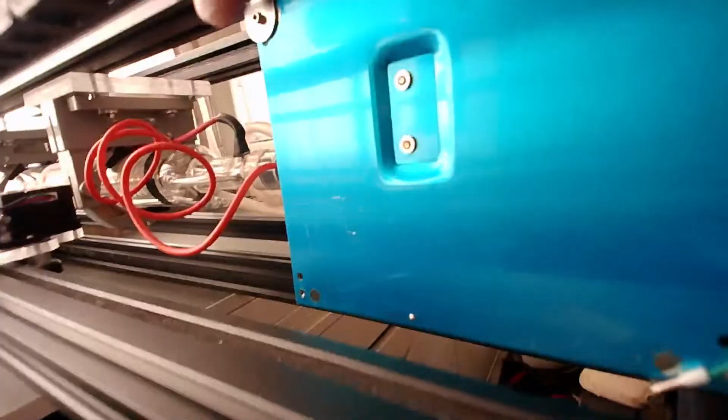It's just pushed inside, and I've moved this runner over so I can see all the LEDs and stuff shining on the panel. And the gantry - I can't see it very good, but in here I've put some foam, cut some strips of it, and used it to slot in the V like that. You put your cable in, push that in, and it sits in the V and holds your cable down. That was a good idea.

I found a few switches and things - about 4 of these illuminated switches. You can't see them. They're not really any good for high power though, it's low voltage stuff really. So I've got a load of these switches, but they're no good, all low voltage, no good for high power.

I found a pot, 23K. I don't know if it's any good for what we want, I'm going to have to find that out. But anyway, I found a knob to go on that pot. And various other switches, but I don't think I'll use some of these. I also found a water temperature gauge, and I've got voltmeters and stuff.

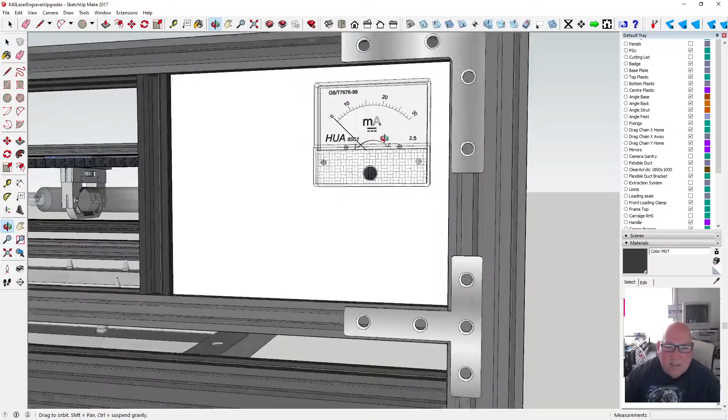Right, so last time we did a meter. Yeah, I did a bit of a meter last time.

So we need to put a rotary control in, some on-off switches, panel meters and stuff. So I think first we'll model the panel meter. A good friend who I bought a laser off for spares - there's a bag of bits with it, and I just noticed yesterday there was a little meter in there. Looks like a temperature gauge.

What's happened to the radio? Is there nothing happened?

Right, so we've got this little panel meter. Oh, it comes with its own little battery by the looks of it. Yeah, battery powered, so that's probably gone flat. Yeah, that's flat. I suppose we ought to light it up really.

I've got some voltage meters, a few which I've not used, picked up a while ago. Now the only trouble with this little meter is the lead is only so big, and it's a temperature thing I think. I ought to put some things in and see what it is.

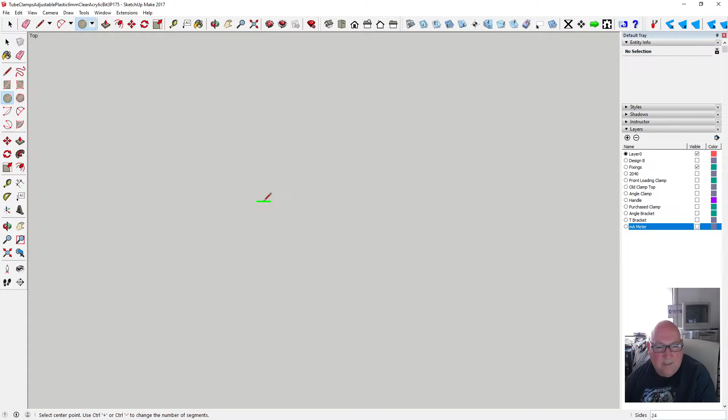Okay, so we'll go the right way up. Is it that way? Don't know, let's just do it that way. Right, 32 mil, so 16 mil, and it's 10 mil thick.

Right, that's the bottom steel bit, so we can colour that steel if you want. Let's colour that steel. Metal.

Okay, that's coloured. Right, the next bit is a bit of plastic, well, black - that's what we're modelling, that thing there. So it's another 32 mil diameter, but it's not so thick.

6.5 mil, so I'll go again. I'll just group that one - group it, group it. We'll do this one - 6.5 mil, and that's going to be a group as well.

And that's going to be painted black plastic, so we'll do synthetic. Okay, that's that synthetic bit.

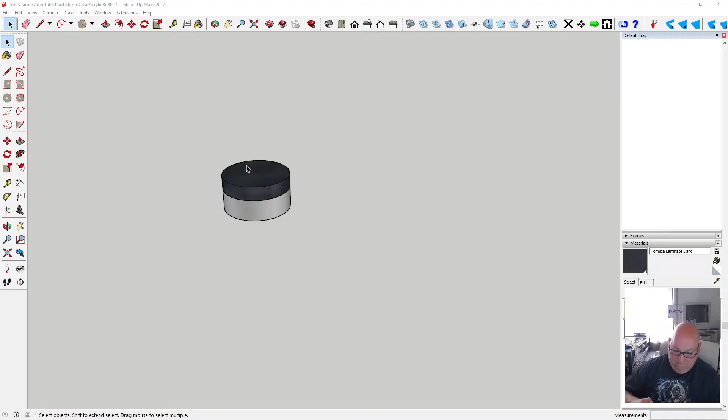So I still haven't fired this laser up yet. So that's a 9mm diameter, 9mm by 11mm.

So we'll go in here, so we do 4.5 by 11mm. That's the threaded shaft, and it's got a bit of a step on it, so we'll do 0.5 and then we'll drop that down. 0.5, that's it.

Right, and then we've got the other shaft - let's make that a group. We'll do it in stages, a bit like the Apollo rocket.

Right, then we've got 6mm by... 10.5, so 6mm by 10.5. 3mm and 10.5. Okay, that's a smooth one.

There is a little bit of a slot in the top, so again we'll bevel it. Let's do it again - 0.5 and drop that down, 0.5, and don't forget the slot.

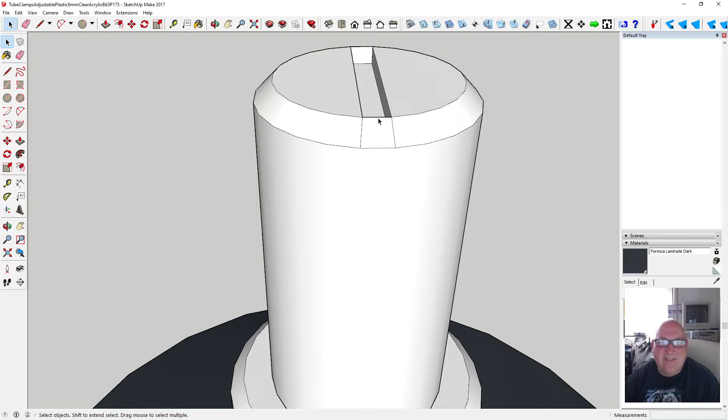Anyway, my gaffer laughed today. I said I've got to go on a live stream tonight and show this bulkhead. I said, how many people are watching? Not a lot. They laughed at me. Oh well.

They laughed at me. Can I get rid of that one? Yeah. Can't get rid of... no, can't get rid of that one.

Okay, it's a bit weird, I'll give you that. But anyway.

Oh, somebody's playing Silly Buggers on the radio.

Okay, so we've got a slot. It's a bit of a weird slot, I'll give you that, but anyway, it's a slot nonetheless.

Somebody's doing test signals.

Okay. Right. So let's make that a group.

Okay, so we've got something like a pot. We've got to put the... there's a bit more to it than meets the eye. No, actually there isn't at the minute, because I haven't put it on. If it was on, then it would meet the eye. There's more to go on it that doesn't meet the eye at the minute, but it will do once I've done it. Crazy.

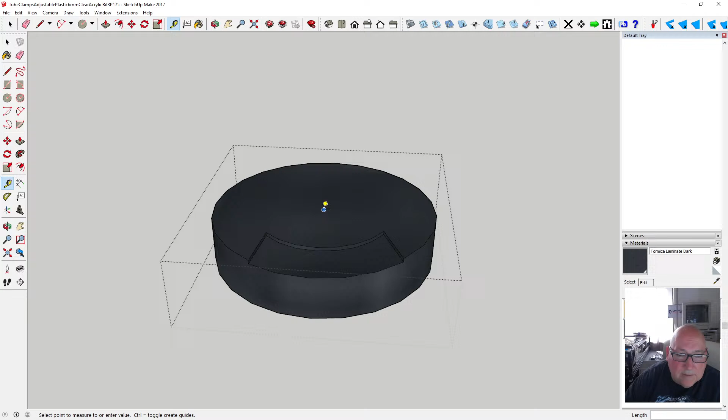And it's, where is it from the edge? Hang on, let's try and work out centre to centre. 13 mil. So if I go from the middle, it's going to go that way, I think. 13 mil. No, it's going the wrong way.

Right, 13 mil. Right, now the problem is it's not quite in the right place. So let's say it's 1.25. And it's... how high? How high can you climb? 2 mil.

It's 2 millimeters. How high can you climb? There's also a step on this somewhere. Yeah, metal step, so...

Alright, 10 mil. So we want a little bit of a plate here in the middle. 5 mil. Like that, and it's flush with it, but it needs to be coloured silver. Metal.

That's it. Okay, and then we've got the prongs that come off. Oh, there's some dinks, some little locator things. Right, we better put the locators in. There's some kind of locators in that sit down the side here.

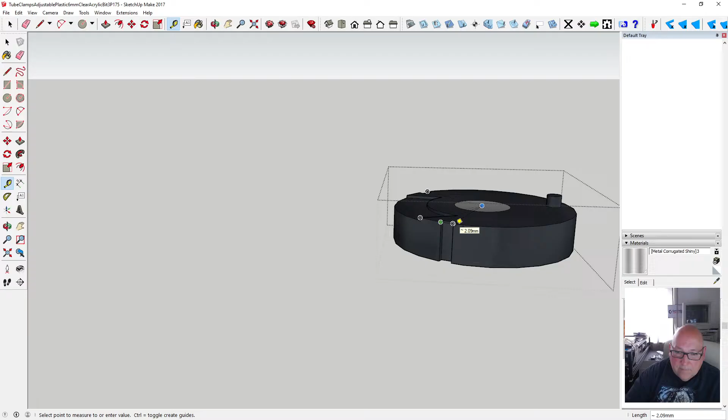Oh, we've got 2 mil. So we need the centre point. So I'll draw a line down. And I'll get a reading off it. 1 mil. And 1 mil. Draw 2 lines.

And get rid of that line. Get rid of these. And push it in by... need to push it in. Oh. My fault. Look what I did to that. Drew it nowhere. I drew it nowhere. It's out in the middle of nowhere, that's why.

How am I going to do that? I have to get rid of it. Guess, I suppose.

1 mil. It's got some weird stuff going on here. Okay, so that's sort of what we've got. You won't see that bit.

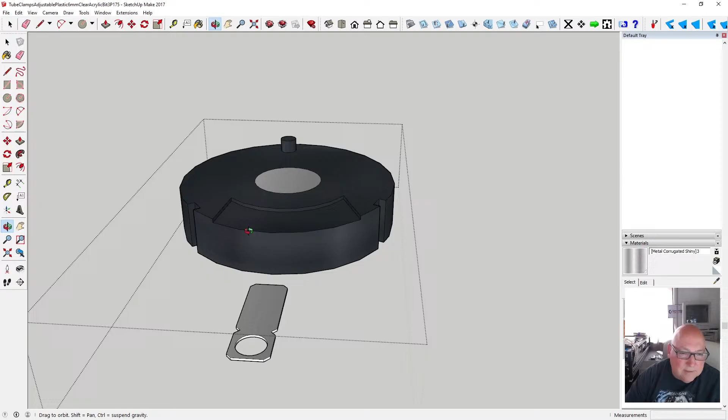Okay, right, so we need to get it now. Make it a component, or group it. Let's make it a component.

Right, so I need to move it to somewhere. Like that, and now it's the wrong angle, so we'll have to just move it. That looks about right, sticking out quite a bit, so it needs to go in.

It needs to go in a little bit towards, so 0.5 in. Okay, it needs to stick up a bit. Oh, it's actually set down if anything. Set down, so it needs to go down about 2mm. Okay, 2mm down, and there's a kind of gap, it looks like it's sealed in there.

So we want a bit of a, probably about 1 mil. Booming. So then we've got a bit of a gap here. It's not quite like that. And it goes down almost to the base. Let's say 1.75. Yeah, that's about it.

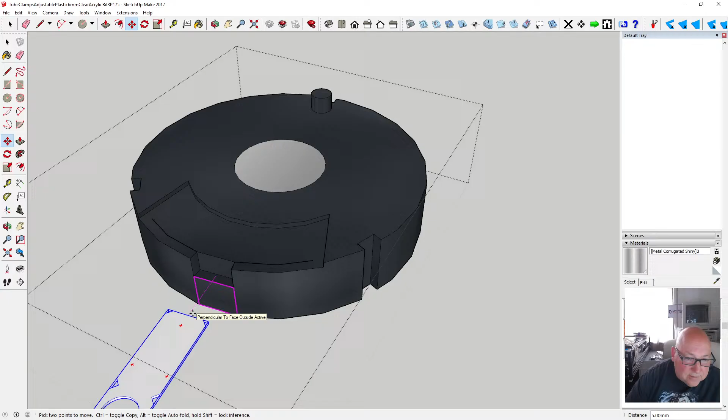I need to move it in, needs to go in towards the centre. How can I get it to? That's it, that's the one. Let's just save it.

Okay, we want another 2 of them, another 2 of them. So that needs to go all the way over. Okay, and this one needs to go all the way over to there.

Then we want a line like that, and a line like that, and we can get rid of this line and this line, and we want to go down 2.25 and 2.25. Can I get rid of that? Yeah, extra geometry I didn't want. Right, okay, so that's that, but we need another one of these.

Another 2 of these, so what I'll do, I need to rotate it, need to grab it from here, and copy it, and put it somewhere here. So look, that's not too bad.

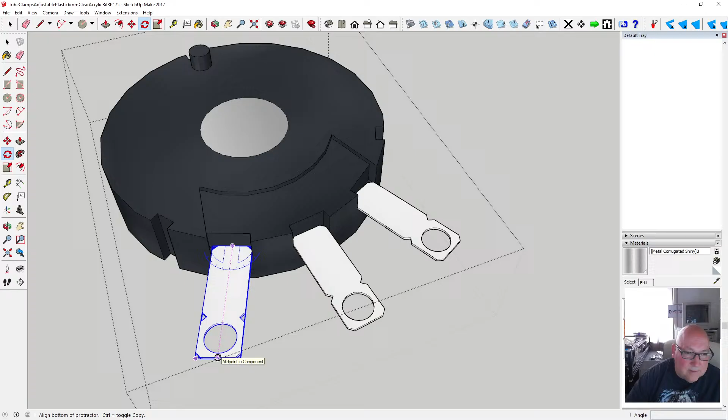I need to go in. Oh, it needs to go just in towards something. Right, don't know, what's that like? It's not that bad, is it? Right, okay, it's not that bad.

Okay, so we've got something like that. Right, so that'll do for that. Save. Nuts next, nuts and washers.

Right, so the washer is, diameter of the washer, 15 mil with a 9 mil ID. So 4.5, oh, that's the other bit, sorry, wrong. So 15 mil, so 7.5 with a 4.5 inner.

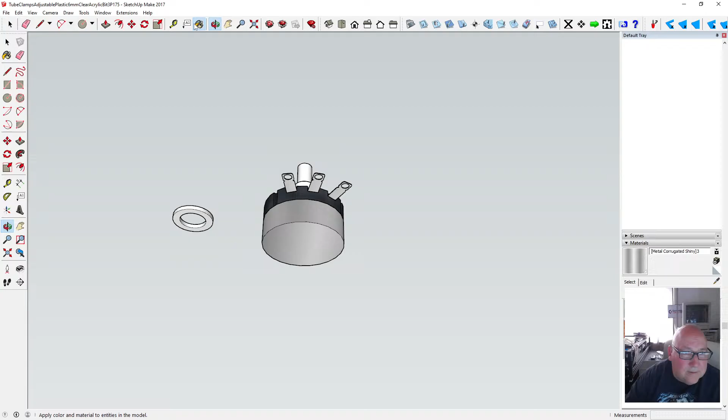Right, let's try and do the split. So this washer, it's slightly offset, isn't it? There's a cut in it. Right, that's interesting. It's slit on an angle. It's slit right on an angle.

You don't realise until you look closely at this stuff. Right, so let's get it slit on an angle, and it's coming from there to there, say.

Alrighty, hell. That's it. So we've got a bit of a slit going on. I've got to raise the one half up, the one half down.

So that's going to be interesting how I do that. So what I need to do is probably somehow, probably going to have to put a split somewhere over here, or a bend.

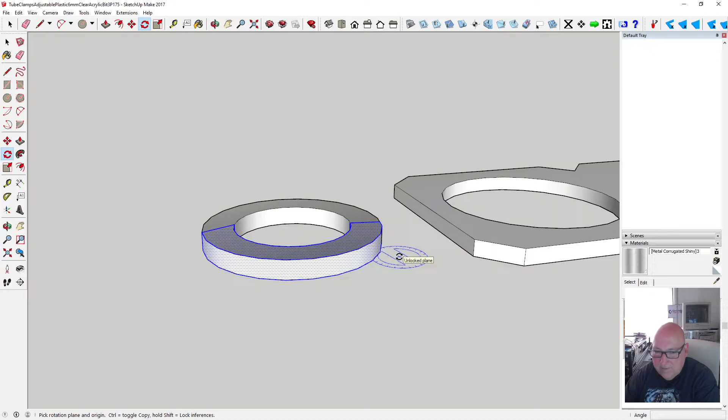I really ought to have this rotated on the axis. Let's try it. So if I go like that and like that, then lift. Oh, lifting the whole thing still. It's weird. Right, what about if I cut it?

And we need just to rotate this end. I'm in my own way now. Dear me. Oh, I can't see. Right. Oh, no, that's not good.

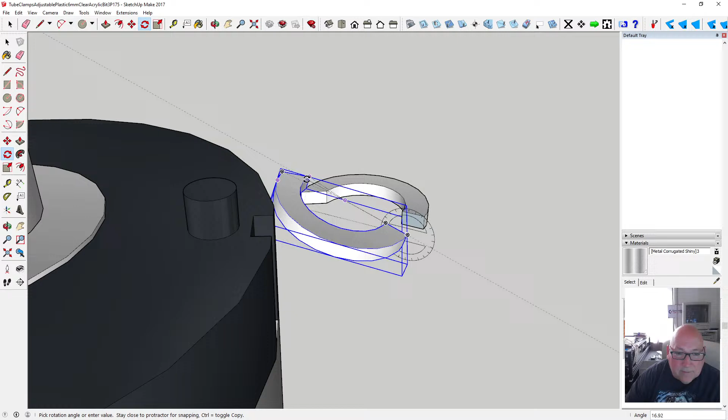And let's go this one up by 5. Did I do 0.5? Hang on, did I do something silly then? Right, undo, rotate, ah. I did 0.5 instead of 5, oh silly. Silly me.

So we're gonna go down by 5. And this one's gonna go up by 5. If it'll let me.

Come on, you can do it. I've got to go back. I'm too close to the thing. Ah, that's better.

And it's going to go up by 5. Okay. And then I've got to put the two together. Like that.

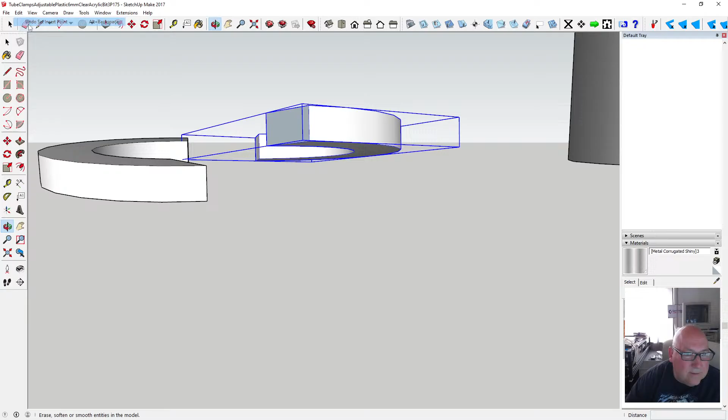So undo, setting for undo, move, undo, rotate, rotate. Let's try again.

Right, so we're going to rotate this by only 0.25. And this one we're going to rotate down by 0.25. And then we're going to join the two together roughly.

Okay, what have we got? Oh, I've done it silly, haven't I? Shit, I've done it by 0.25. It should have been 2.5. Oh well, right, we'll try again.

So rotate that up by 2.5. No, what the hell? Rotate that up by 2.5. Maybe it was right. Oh, I put 0.25 in it. Yeah.

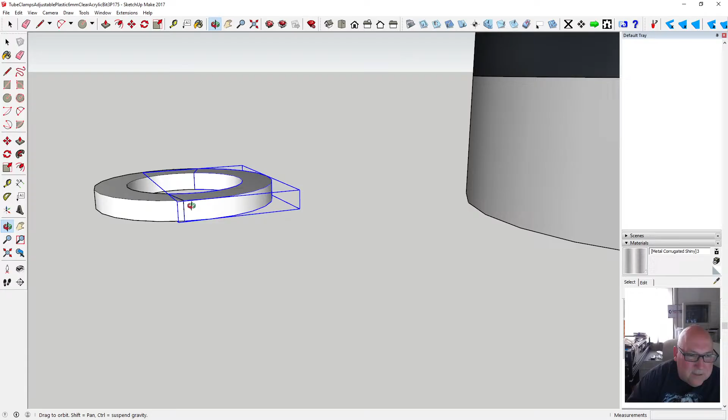So I've got no clue how to do this. Tell you what, it's not worth the effort. Tell you what, I'll cheat. Shall I cheat? Nah, let's leave it like that.

Oh shit, how can I do this now? Explode, explode. Turn that off. I'm in my way now. I'm in my own way. Right, so one piece again.

Right, that's it, I don't care. I don't care. I really don't care.

Right, so that's sat. No, it's not sat on anything. Why is it not sat on anything? It's a different size. It's a looser fit, yeah. It's not good.

Okay, we'll do it a different way. Grab it from there, go from there. I can't get the centre. Don't have a centre with that thing in the way. There's a centre.

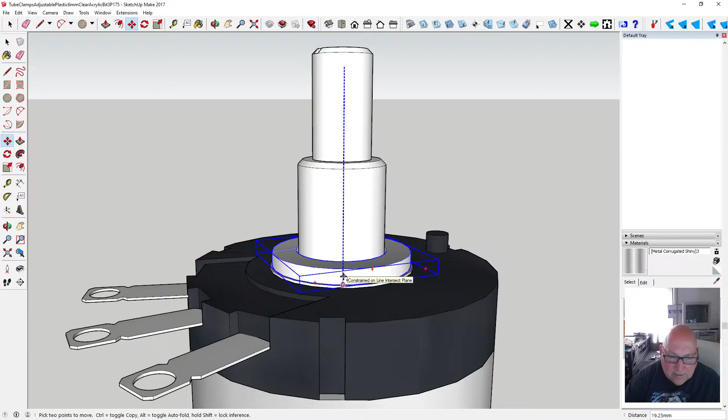Right, so we're going to come down on the blue all the way down to the surface. It's trying to tell me where it wants to put it, and I will go with that. That's fine. Right, so there's that.

Now we need the nut. The last thing to go on is the nut. The little nut. Let's do the nut. Do the nut before I do me nut.

I don't know how you do a nut, whether you do it from the flats or the sides, I've no clue. I think I tried the flats last time, it didn't work. So 13.5 with the inner ID of 8.

So grab one of these. 13.5. So it's 12.75. No. 6.75. 13.5. I forgot what the inner ID was now. 8. So 8.

Take that out. How thick is it? Thickness is 2 mil. 2.25 actually, but 2, okay, let's just do that.

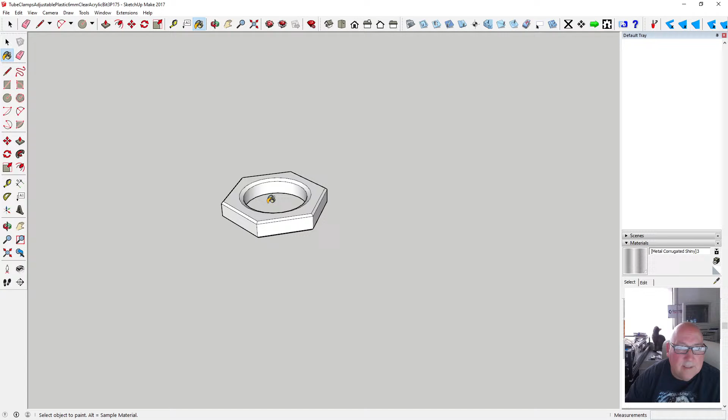without the thread. Let's paint it. I only paint the surface, I don't go painting everything, it's pointless really. I suppose I could paint this bit. Maybe the inside and that's it. Yeah. Maybe this bit. No. That'll do for the nut.

Right, let's make it a component. Let's put it on top. I'll do the same trick again, I think.

Okay, let's try that. Looks about right. All the way down, let it go itself. Is that right? It's not quite right. Ah, because I got it from the wrong side.

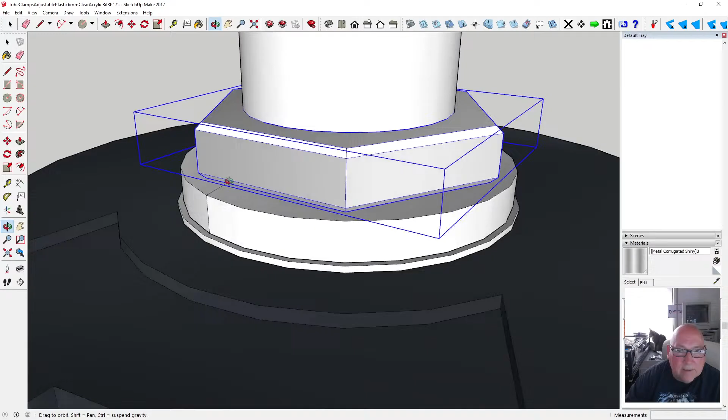Okay, oh, I suppose we better do a knob next. Gotta have the knob on it. I've run out of things to say earlier, so I just got more. I'm doing more.

Right, I can go back. Hello cat, what are you doing in here? How did that cat get in here? Let's get him on the camera. Hello cat, you alright? You got cat.

Cat. Right, I'll put that away.

Okay, the next thing is to model this little black knob with the red dot on it, the grub screw and the red dot. That should be easy, shouldn't it? Let's get on with it. Right, I need to make that into a component first though.

Make sure I've saved it. Always save it, you don't want to lose your work. Right, a knob, here we go. I'll start from upside down, seeing as that's got the infill.

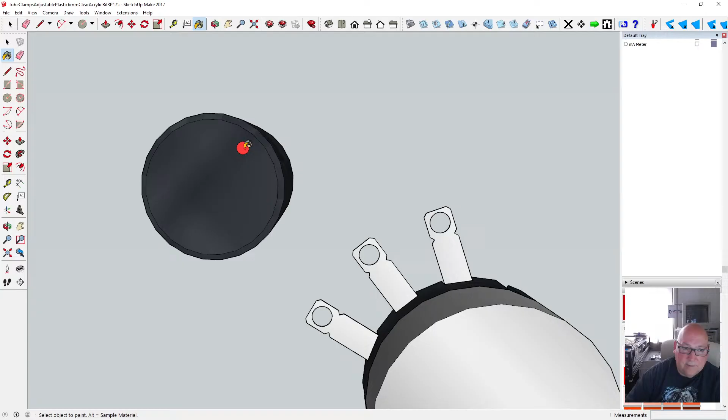Too dark? Too light? Not light enough? Too bright? That's it. Okay, so that's that done.

Right, just got to model this side of it now. Now there's a grub screw. How am I going to do a grub screw? Right opposite the hole. So that one there, there's a grub screw.

Let's see, keep it there. Let's say it's there. Ah, that's okay. So I'll put it there and we'll make it about that big. Yeah.

Okay, and it's got a rim on it. It's a little bit out, it's not sat nicely, so can I rotate it? No, I'll tell you what we'll do. Undo the circle. Let's put, alright, so let's put the circle. Oh, once you've clicked, it's too late. How do you get a circle? I'll tell you what, let's just compromise.

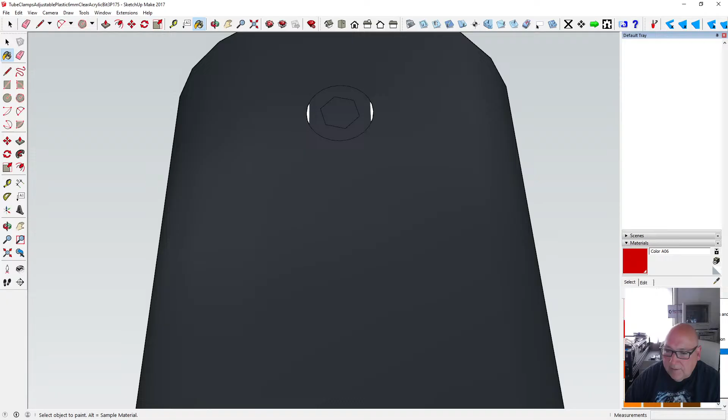Needs to be silver. That needs to be flush. Oh, that needs to be sunk a bit.

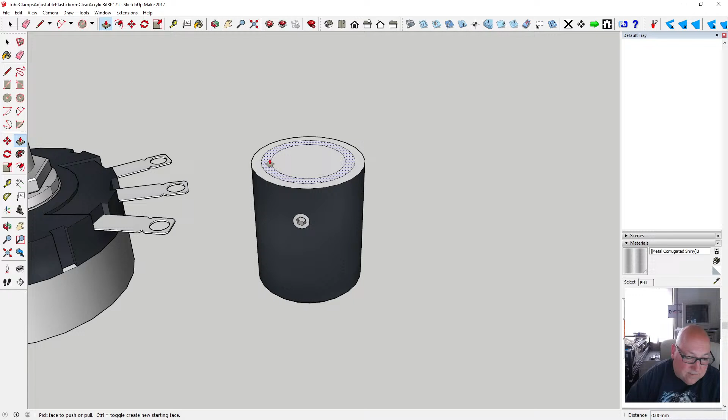Let's say the step is 1.5 mil, and we've got another step in of another 1.5 mil. Then we've got a drop down of... right, so it's a step, so that goes down a little bit, 0.5. This one goes down, looks like 2 mil. And then you've got the inner ID of 6 mil.

Three mil. So then that goes down all the way down, so about 6, say 7, 8 mil.

And then we've got to colour it, synthetic colour, and like that. Okay, and then this is brass. The rest is brass.

That'll be black down there, and this, got to find a brass colour. Metal, have we got brass? No, what's that? Rusted metal? No, okay. Brass colour. Let's try that colour. Bit too bright of brass. That's probably close.

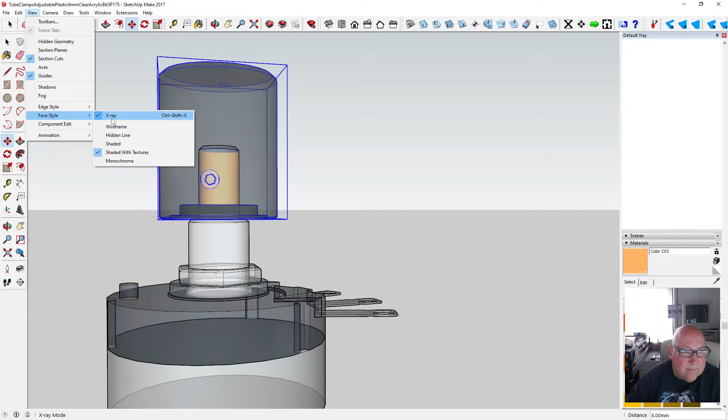Okay, we do it like that. Bring it down an arbitrary amount. That's as good as anywhere, I suppose. Alright.

Oh, we've got a lovely little pot. Actually, it doesn't look quite right, does it? I think it needs to come down more.

Let's just say it like that. Okay. Group.

Okay, so we've got pot, I'll just call it pot. Layer of pot. Pot layer, that's it. What else we got? Meter, T-brackets, clamps, handles, angles, old clamps, aluminium. Alright, so we need none of this.

Thanks for the call, sir. You're 5 and 8, 58, Roger.

Oh, bring back the pot. Okay, so we've got a pot. We've got a bit of a pot going on here, anatomically correct, somewhat. Obviously that'll be on a 1mm panel, so I need to bring the washers up. Need to bring that and that up by 1mm. That's it. So we've got a gap for the panel thickness.

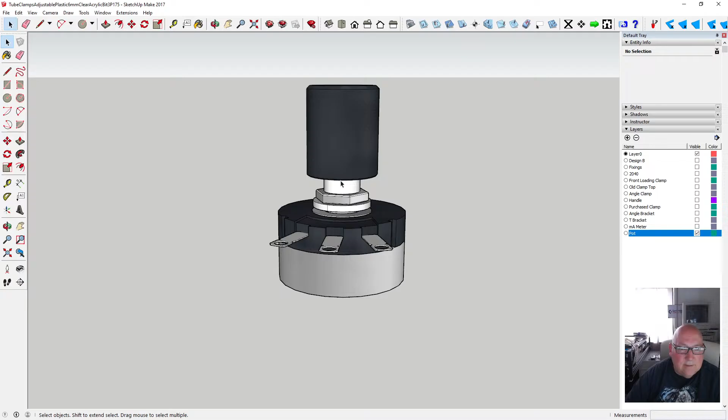Alright, copy. Over to the model. Paste.

Right, needs to be rotated. So we'll rotate it against that.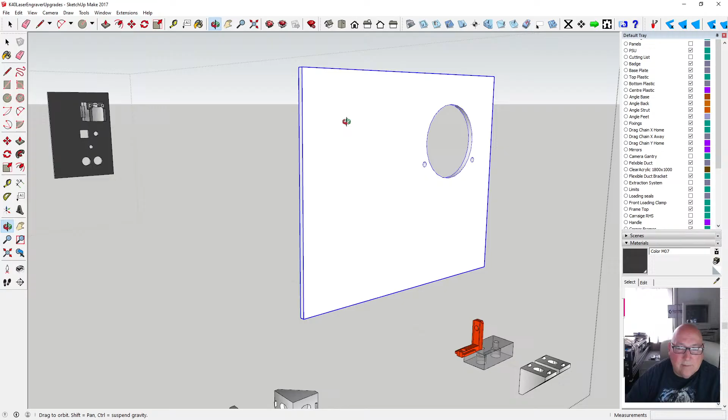Romeo 5, Romeo. 1mm, and it's anodized aluminium.

That'll do. Anodized aluminium. Oh, look at this, it's looking good. I haven't even got it in the right place yet. It looks good though.

Right, I need to go forward. Let's go this side and do it. So I need to get that flush. That needs to go flush along the green axis. No, it needs to go - it is the green, but let's keep going this way. Alright, let's have a look at that.

No, what's happened there? Oh, maybe right, yeah, I think it's right. It is right, but for some reason we're seeing all of this. We shouldn't be seeing all this. I know what it is, that needs to move up. Yeah, because we've got no... well, that locates in there, so yeah, maybe that is right.

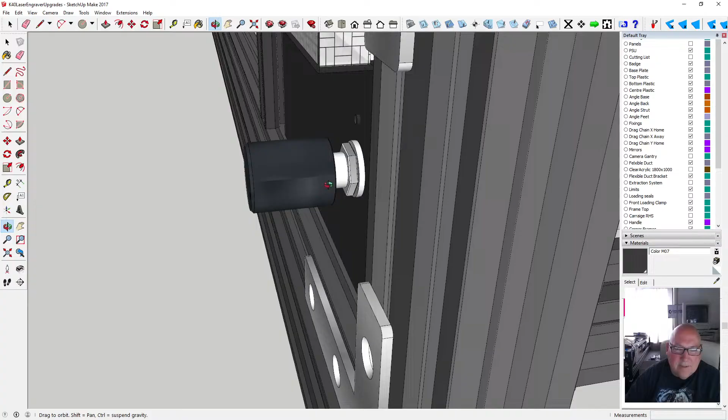Right, so what we'll do, we'll bring these washers forward to about there, then we'll move the whole thing back.

Still gotta go back more. Delta Lima 3 Charlie India, schönen guten Abend.

5-9, alright, and that's probably it. That's probably it.

Yeah, it's a bit better, so it'll need another nut on the back as a spacer, or a spacer, some kind of packer. Might have to mill a piece of plastic washer to go there, so this prong won't go anywhere. So it'll need another lock nut maybe. I don't know how they do it.

How do they do it normally? How do they do it normally? There's no writing on the back.

I suppose I ought to put some writing on the back to tell people what it is.

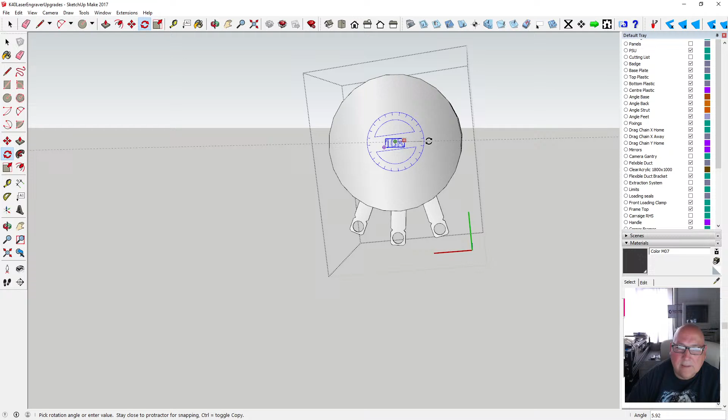Good evening, Golf number 4, November Uniform Oscar. My name is Val, you're 5 and 9 into Northeast England. Go ahead, thank you so much for the nice report, sir, and 5 9 for you. Let's make it black, shall we? 73, yeah, 73 is good luck. Thank you so much, Papa.

Papa. It's a 10K. Right, whatever, that's alright, yeah.

Okay, so we've got a pot, we've got our pot and power, tube power. Why is that like that, shimmering? Don't know, anyway, so that's that. Let's just save the whole thing. So, panel meter, now.

I was watching a video, some guy made it, got loads of buttons here, panel meters, all sorts of stuff, cooling, temperature. I suppose we better measure those. Let's measure those panels.

So we've got the one temperature gauge. I think it's a temperature, yeah, it's a temperature gauge. And we've got a plastic shroud for a voltmeter.

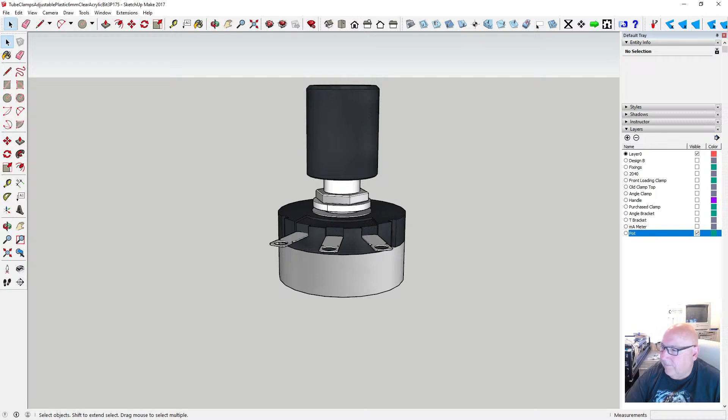Right, so let's model these panel meters then now. Right, so I'll go back over to the other thing. Right, okay, so here we go again, so we get rid of the pot. Right, let's model this out. I've even forgot, I forgot what I had on it now. Alright, let's have a look.

I'll tell you what, I'll just model the front first, the bezel, the outside. So that's 29 by 48. 29 by 48. So 29, so 48 by 29. Right, that's the front plate.

So then we've got a bezel, two mil bezel. And it's thicker the one way, so it's 3 mil the other way, 3 mil down. And then we've got an inner bezel that's 3 mil by, yeah, so we've got another 3 mil either side.

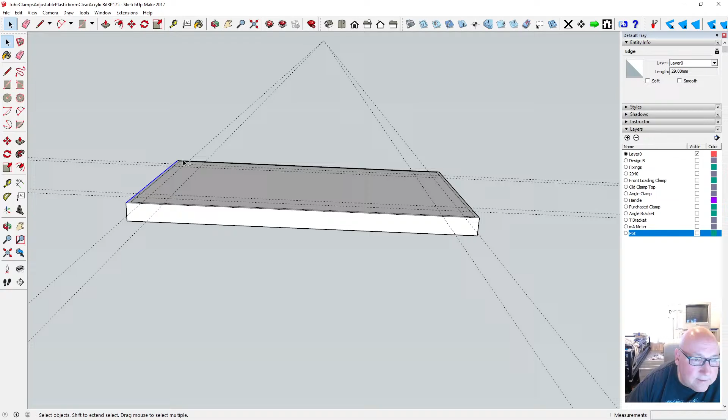So I've got to select that. Not that one. Not, yeah, that one, and that one, and that one. Just make sure I've got the right ones. I've got to pull that down.

No, I'm in the wrong axis. What is going on? By 0.5. Yeah, that's it. Then I've got a flat bezel.

So I'll draw, that's fine there. It goes... what's that? That's the wrong thing. So it goes like that, like that. Yeah, that's the flat area.

Then I've got an area here. Right, and I've got to push the whole thing down. And it goes off on an angle, so let's join that up with that. Right, and I've got to pull that down.

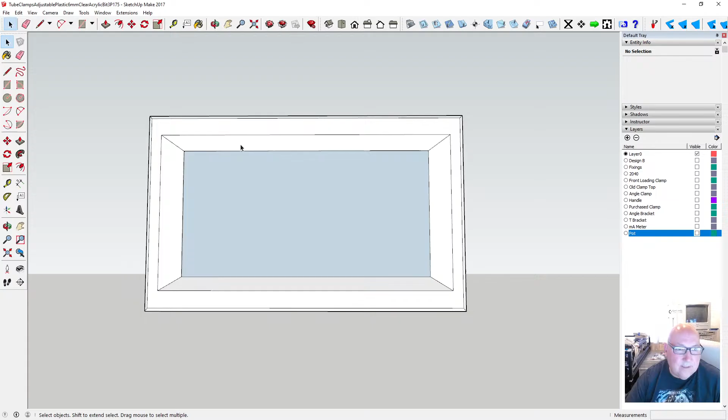Let's get rid of that. That was relatively painless. Okay, so let's paint the front. And it needs to be the synthetic again. That's a different colour, that one is.

Okay. Right, so that's that bit done. Right, so we're slightly down there, so that's right, that's about right actually.

Right, so just save that. Let's try and get the right way up. Right, so we're on the back of it now. It's got a... what size we got here? We've got 29 by

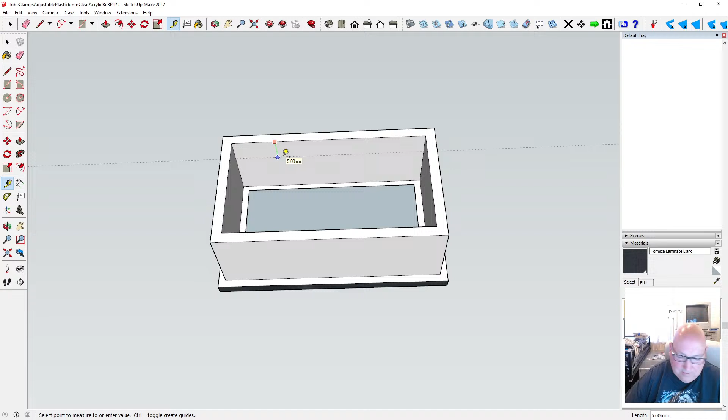And we've got cutouts and latches and stuff around the side. But then we've got a circuit board that covers it, and it looks like about 5 mil down. So 5 mil down. Okay. Let's just draw around this and it'll fill it in.

Okay, and it's a green circuit board, so I'm just going to paint it green. Green, it's sort of this green here now. It's a bit bright, did a bit bright. Right, okay. Green circuit board.

Okay, and it's black again, don't forget it's black again, synthetic. The good thing about doing these models, you can copy and paste them into your own designs and layouts, work out your spacing and that, and make your own layouts.

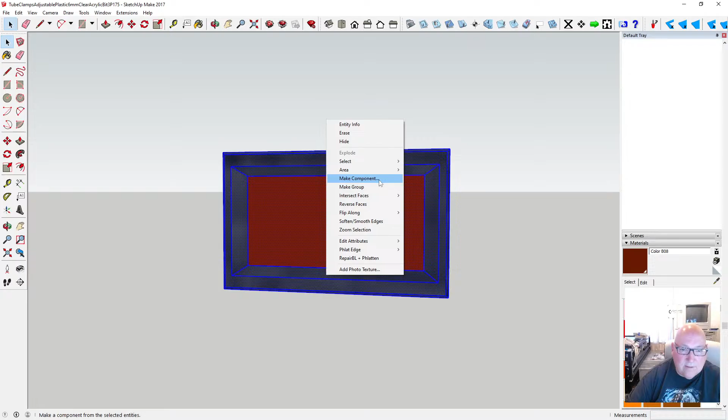Alright, let's create that as a group. Put some text on it. Let's say 13.8. No good.

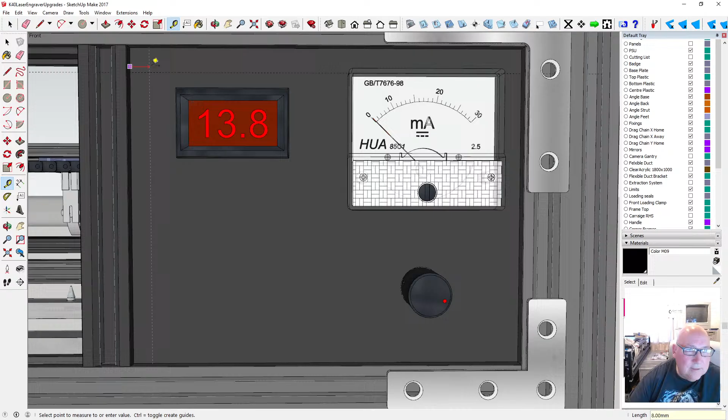We said we were going to do 10 mil and 10 mil. So let's put it somewhere. Oh, what am I doing?

Got the back sticking out there, that's alright. Okay, so we've got a meter there, it looks a bit weird there. Oh, it's sticking too far forward now. Why did it do that? Oh no, it isn't, my line's too far forward. It's the line that's forward, not the... Oh, because I've reduced the panel size, and what I didn't do is push...

Yeah, push that back. They need to be pushed back by 2 mil. Well, that's right now, but this one is still sticking out. Let's get rid of them. I'll line them up on the wrong thing.

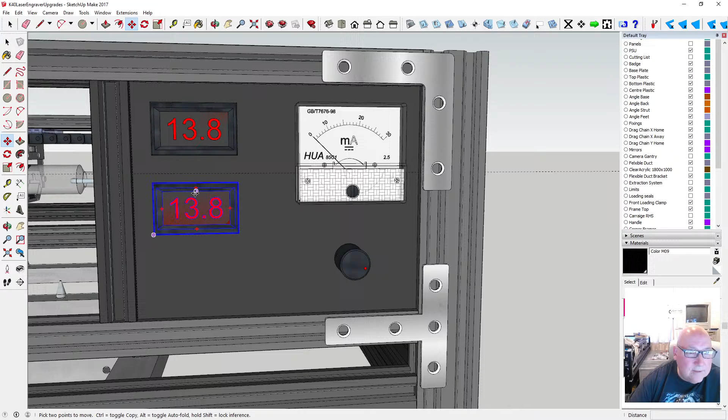Okay, this one needs to be temperature instead. Alright, so I need to do this one again. So 11 degrees. How do you do the degree symbol? Deg. 11.0 degrees C. Oh, it's gone back to this again.

Right, so it's going to be an LCD display, this is, so that's going to be green. Who's this annoying person? Keying up on the channels. So an LCD, it's going to be a grey LCD. Not quite grey enough.

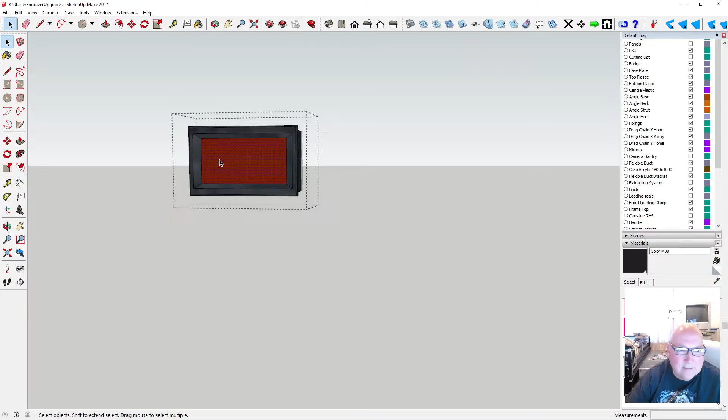Oh shit, I didn't make it unique. Son of a bitch. Make it unique. Son of a bitch. Oh, great. Thank you very much.

Okay. We've got some shimmering going on. Why have we got shimmering? Ah, because that's the... we haven't cut it out, that's why. Yeah, got shimmering going on there. So what we need to do is go into here.

Grab this. Not that, the outline. Grab the outline. Copy it. Paste it in place. It should be this side. That should be flush, yeah it is. I need to cut it. Paste it in place.

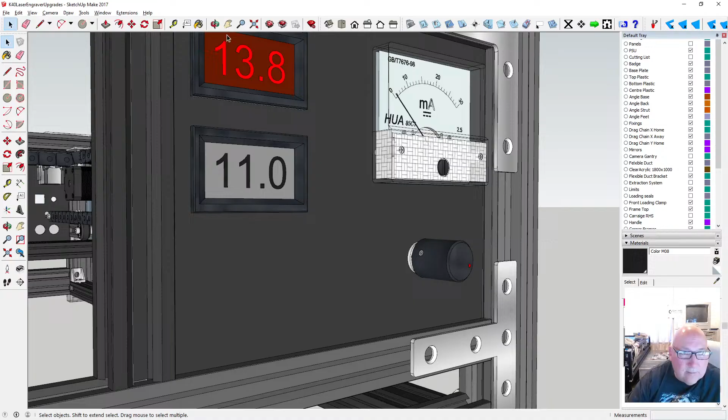So we need to grab this one now. Get the back of this. It's the trouble, when you have it dark, you can't see where the outlines are. Easy.

Right, I do 0.5 bigger, and should be able to then push it through. Yeah, so we've got our two cutouts, our two panels. Maybe I should have spaced them over here a bit, but we might be able to put some knobs in there or something. So we'll leave them there, 10mm gap.

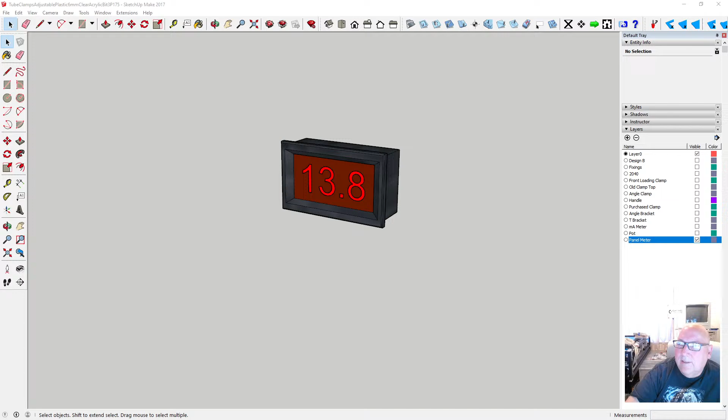Right, what I need to do now is open up a new instance. I've got to find a model now, since I've already modelled the button. So I've got to find it, and it's... right, let's bring another one up. Right, file open.

Oh, SketchUp. Right, what did I call it? It's the... can't remember what I called it now. It's something to do with intercom. Intercom front panel. God, I haven't opened it for so long. Call station, was that it?

That's the cowl. Button. Front plate. Top aluminium. No, it's not showing anything. LCD, no, it's not on. Oh, there's a speaker. Speaker. There's one of my panels. This is my project, I've got to get back onto this project at some point. Camera.

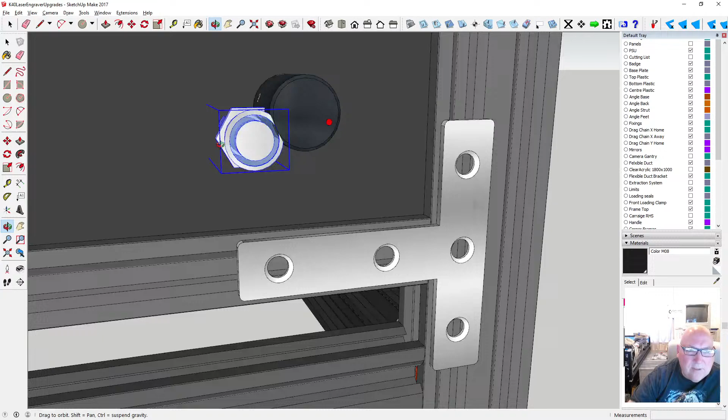Buttons, in the middle of nowhere. This button doesn't look very big - it's probably the wrong size. Looks like I'm going to have to model this button myself, because these buttons are bigger, a lot bigger, so these are the ones I'm going to use because I've already got them. So that's what I'm trying to model now - a little power button with an LED.

I've had these for ages, think they were £1 each or something. Right, anyway, so I've got to model that by the looks of it. I can measure the one I've got, see if it's something like.

How do I measure that? That's not easy to measure, is it? 12mm... well this is more like 20mm. I'm about to sneeze. Yeah, it's just... that's like 19mm. So yeah, okay, I'll just have to model it - when have I got time now?

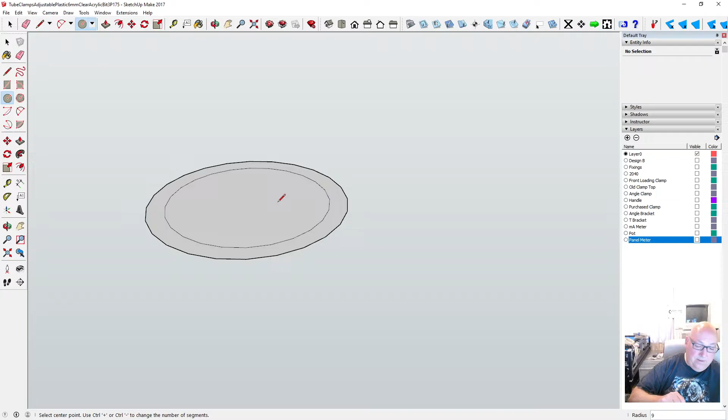Alright, so 22mm, start off with 22mm, so 11. Okay, we're going to do the bottom first. Try to measure it - 1.5mm, another one of 1.5mm, then we've got 12.5mm, 12.5mm. So what is that?

15mm. Okay, 12.5mm, 6.25. Okay, so we've got an extra ring there for some reason - oh, we've got a bit of flat. Yeah, there's a flat I didn't allow for. The flat's only a mil.

Right, hang on then - 1.5mm. So I need to get rid of that, and how much is it? 1mm. That's better. Then you've got the thing there, and then you've got the centre bit, which is 12.5mm. Yeah, that's better. And you've also got your round bit in the middle, which we'll sort out in a minute.

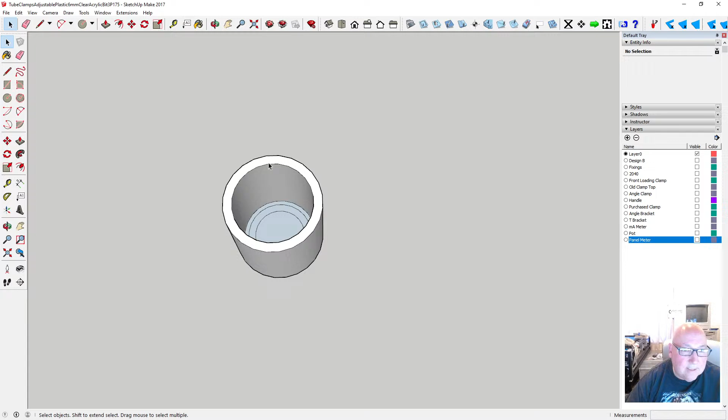Yeah, so we're not doing that side at the minute, we're doing the other side, so that's right. And we want to come in. Right, what have I done here? So there, oh, there's me out of it. Yeah, that's right. That's it, so we need to bring that down 2mm, 1.5mm.

1.5mm. Okay. Looks a bit steep to me. Maybe too steep.

1.25mm, that's probably better. Then we've got a pushy click that's a little bit in, not a lot. Down 0.25. And we've got the inner bit, which is flush with that.

Right, then we've got a diameter of, need to do whatever size the thread is now. 19mm. Yeah, 19mm. So we need 19mm. That's 8, 9, 9.5.

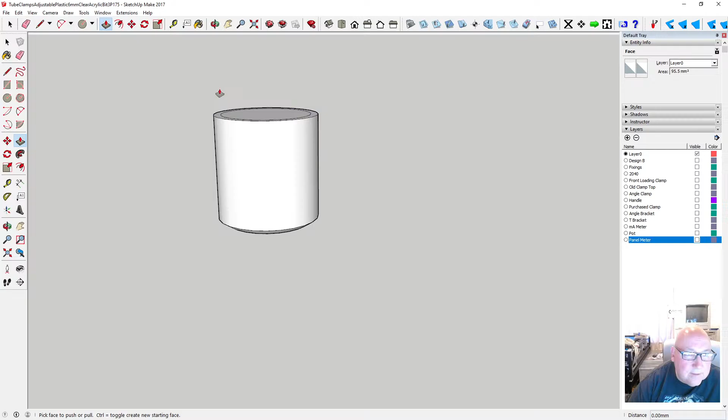Okay, and we need to bring that down almost all the way, and it's the thickness of 0.5mm. So what's the length? 21.75. So we bring it down 21.

21, that's not too bad actually. It needs to be a bit thinner though. 0.25, that's about it. Yeah, that's it.

Okay, and while we're here, we might as well bevel the top bit. So we'll come in. It's not a lot. I can measure it actually. Let's just measure it. 15mm. So let's put this on. It's 15mm, 7.5.

Right, now we need to come down by, looks like 3mm. But it is rounded instead of like that, so that's not going to be... How did I do it last time to make it rounded? Anyway, that'll be fine. We'll leave it like that.

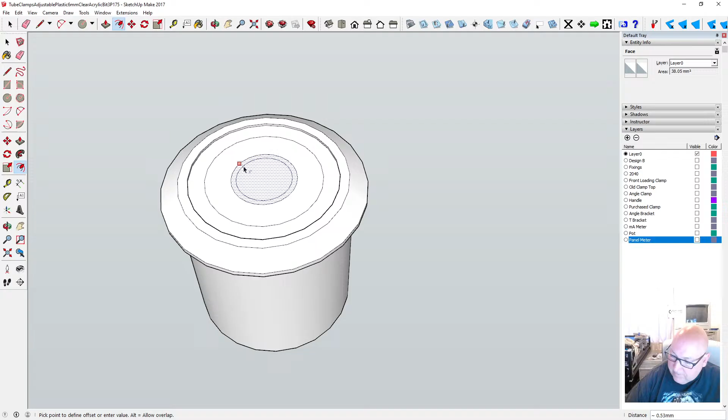Yeah, and then we want to split it. So say there to there, and there to there. Get rid of that. And then we want a little flat bar.

So it's 2mil from here. Let's say 2mil. That doesn't quite go to the center. Say 1mil off, 1mil or 0.5. 0.5.

So we want a rectangle. No, it's not going to let us do like that, is it? So we'll go across. How can we have a rectangle there?

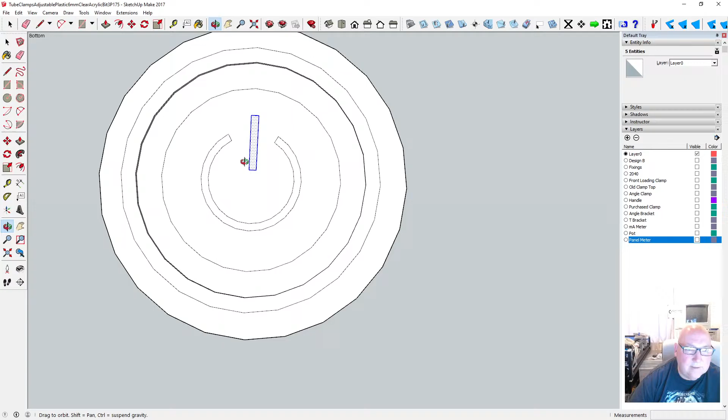Didn't want to go. It refused to go. Right, what's that like? Is that? It's not quite right. Anyway, so it is what it is. Right.

Let's... So you want some kind of translucent synthetic stuff. So we want metal first. Chrome. That's not chrome. Don't think I have a chrome. Metal silver. Okay, so we've got a metal silver.

Looks horrible. That's just grey. That's horrible. Not very good. Don't see, they can't do... computer graphics can't do a silver for some reason, a shiny silver. Colours. Anyway.

Okay. That's it. Right, that's okay. Right, so these colours are sort of translucent, synthetic. Oh, what happened there?

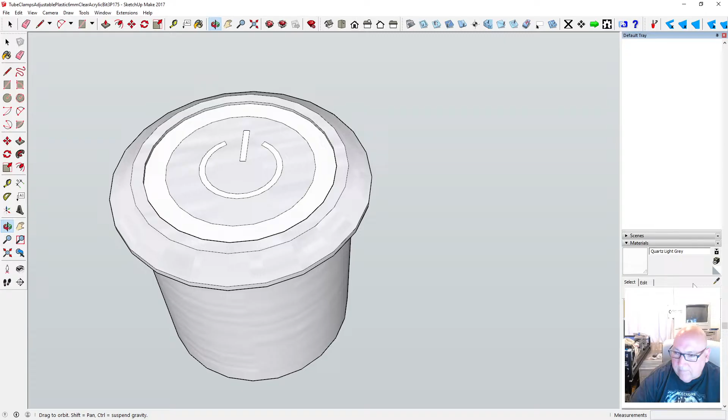Okay, so we've got this button, doesn't look any good because it's not lit up. So I suppose we ought to make it lit up really. So it's going to be blue. What about that? Oh yeah, that'll do.

Right, okay, so we've got this bit. There's all the pins and stuff that stick out the back. I'm not going to do too many pins, I don't think. I'm just going to put the size of it on. Right, so what size is that? 9mm. So we'll come up 9mm. And that's where the pins stick out.

I really can't be bothered to do pins at the minute, so... and that's some kind of translucent material. This must be where the light shines through. That'll do.

Right, that's it then. So we just want the nut now, the great big nut. Let's do what we did last time, it seemed to work for us. Right. Measure from corner to corner of the nut. 25mm and 18mm inner. Right, here we go.

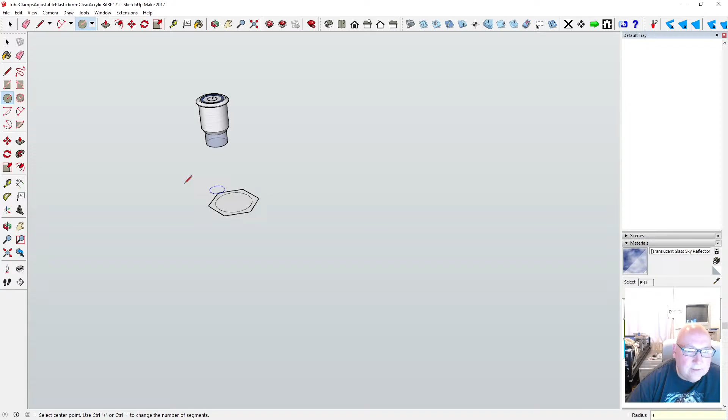So I want one of these. 25mm. So 12.5. And we want a 18mm inner. We don't want that anymore, and we want to make this the thickness of something. It's a lot thicker than the other one. 3mm.

3mm. And then you can do pullback of, how much is it? 0.5. 0.5. 0.5. Is it 0.5? It is really. Sort of. Right, okay. Point 5. Point 5.

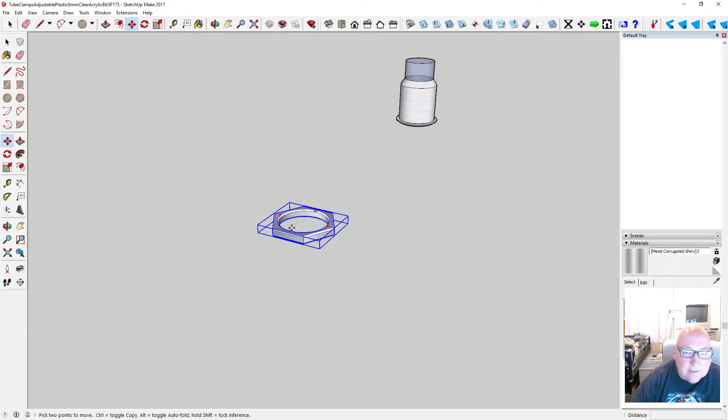Okay, so we're going to put that over here now. Right, let's... so for some reason we've got 18mm over a 19mm because the thread has to go into there, so that's why we haven't got the right amount.

Right, how do we do this? It doesn't matter. Right, let's bring that down. So they go up again. Okay, and we need to give it a 1mm clearance. That's it.

Group. No, sorry, make it component. There we go. Right. Okay. Button. Button. Save it.

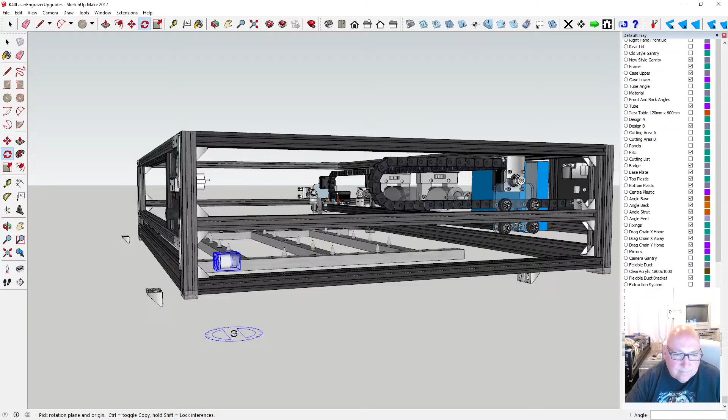It's not quite, the button's not quite lined up. See that? Why does it do that? I don't know. Anyway, it's weird. I don't know why it does that. Probably because I'm just doing it in free floating space.

Right, let's put this over here. No, I don't want to alter it. Right, I can't see it. Oh, there's no one on here.

Right, that's okay, so we've just got to line it up now. So we want to do 10 mil up, and 10 mil in. Then we do another 10 mil, and we'll come in, I don't know, 10 mil.

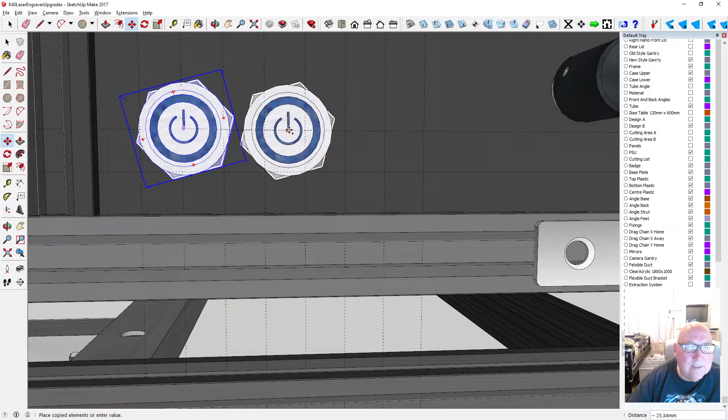Alright, we don't seem to have space for another one. That might have to go up. Oh, that's no good.

Right, so that's gonna have to go up by the looks of it. How far up though? 15 mil. Well, it just about goes, isn't it? That's why I model them, so I can make sure it looks right - it's a bit weird there. So it looks a bit nonchalant.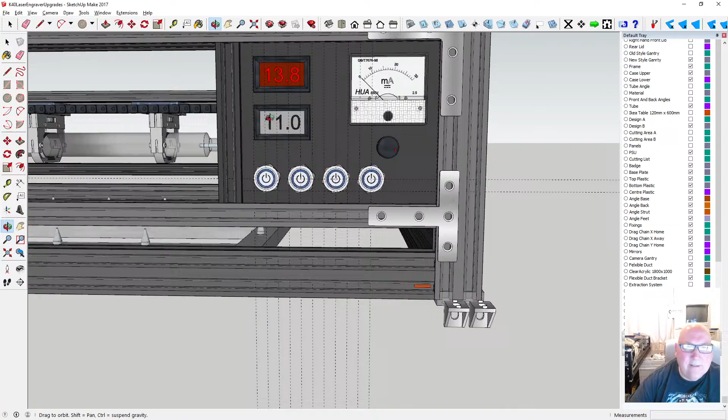So, and they've got to go back a bit as well in a minute. Yeah, it's looking weird. Right. I think we can move that over a bit, maybe. I don't know. I'm gonna need more holes in it anyway.

I don't know what to say. Let's just do another 10 mil. Another 20 mil. Let's put another one there. Why not? I haven't got another one.

Anything to make it look symmetrical. Let's get rid of these. You can always cut a new one out - a bit of waste of alley, but actually I've got to be careful. Right, that's not too bad, is it? It's not too bad.

Yeah, it's a little bit - that's the centre, these aren't the centre. So that's a bit of a shame. What shall I do with it? Move them all? I don't know. Tell you what, no, I don't know what to do.

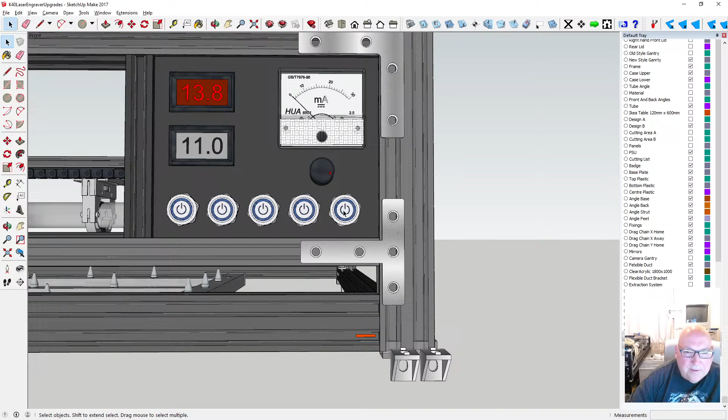Oh dear, yeah, so that's not quite right. Well, I haven't got enough switches, so how do I do this?

Oh, I know what I did wrong. I put the wrong thing onto the face. Should have been this onto the face, like that, that should have been that. Oh, hang on, yeah, that's it. That's right, onto the face of the component.

Right, it's a little bit off, so it's not centre. But if I move the whole thing over, then this will be too far over that way. So, what do I do? What do I do? That'll annoy the hell out of me. If I'm like that, I think, oh, what's that doing there?

Meters in the right place. These need to go over a bit. Can't really put them. Yeah, you could probably put them here, maybe. That can be turned around so it's facing that way. I don't know.

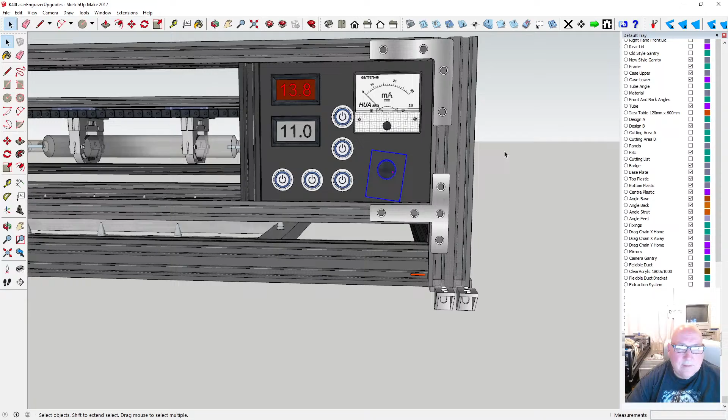Oh, it's too low now. Right, is it too low? Yeah, too low, need to go back up 5mm. It's got to look right. Yeah, that looks right. You can put a bigger dial on if you want as well - you got space for a dial.

Now these are too far over, so they can afford to go over 5mm each. Okay, that's alright. Now it looks like it needs one at the top.

Okay, so we've got that level with that, down here. We've got 4, we haven't got 5, only 4 of those. It's alright, looks like we need another panel meter down the bottom. There's water temperature, milliamps and voltage. Let's put another one in.

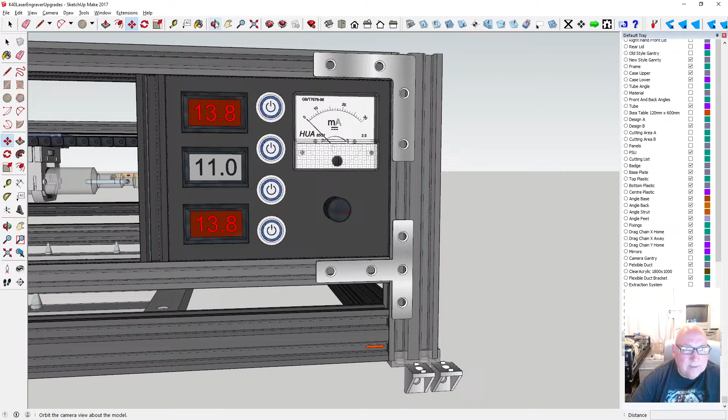Move that one up by 5mm. Move this one up by 10mm. I haven't got room for another one. Oh, needs the milliamp one over here, doesn't it? Undo, undo. Right, so the milliamp one, you got analog and, yeah.

And if it needs to come down. Right, okay, makes sense now. So we want the milliamps, so another one of these over here.

I think we can afford to go up 5mm. Yeah, up 5mm. I need to drop it down to the face of the component. And the knob needs to come down.

It's not going to work, is it? 20mm. It's not going to work, I don't think, because it's just in the way. If I can stick it out the side, it'll work. Might just go, then that's in the way. So I need to go up a little bit more with this one, 2mm up.

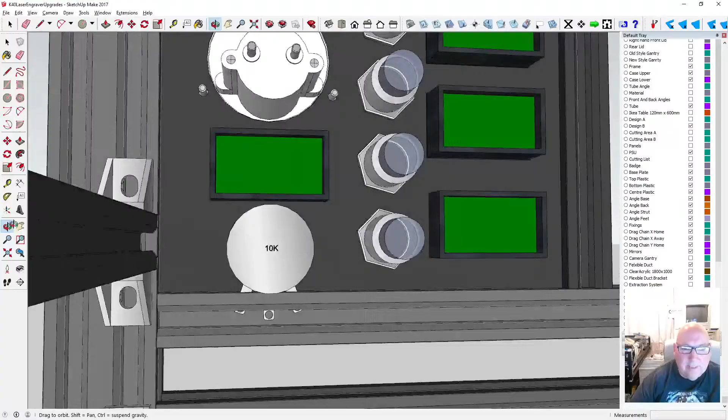Don't want to go too much further. Go a little bit more maybe, another 1 mil, so I've got a bit of clearance there. Tell you what, let's go another 1 mil. Hang on. Yeah, and then we can go up 1 mil. Yeah, that'll clear it, and we can just rotate it that way.

Alright, okay, so what's it looking like now? Let's look at it straight on. Alright, what we got here? Buttons, 3 panel meters. That's a little bit high.

Okay, so let's come down 1 mil, another 1 mil. What's that like? Yeah, that'll do. And then this one, to center it, needs to come down 1 mil. That should be the same from there to there, as it is from there to... no. Alright.

Oh, the model's got me. Let's get this done, because I don't want to get done, go and do something else. 3 hours to do, watch the television. Come on, let's get out of this model.

Okay, so we've got to do the knob cutouts and the other one of these yet. So no peace for the wicked, no chance of watching a film. The time is going, oh my god.

What is going on here? What's that? Seem to have a... what is it? Something going on there. What on earth is going on here? I don't know. What on earth is going on?

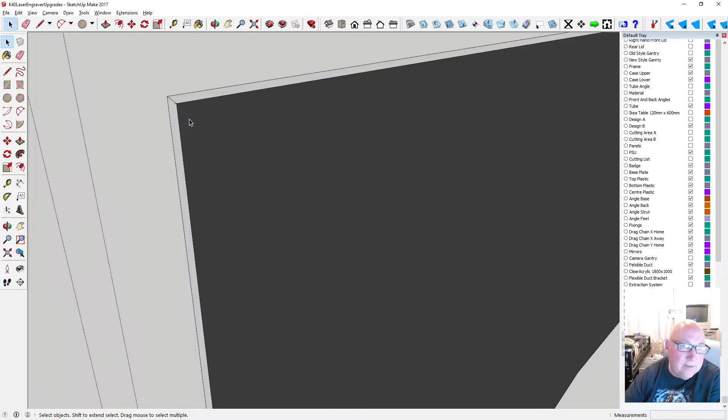0.9 of a mil. Dealing with corruption. Can I just do that? No. Okay, fair enough. I think... yeah, it's okay. Right.

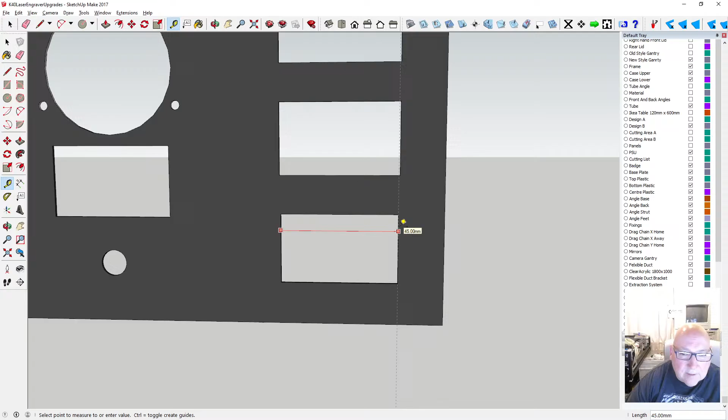These two we add in. I'm pretty sure they're the right size. 45. Yeah, by. And this one's not the right size. Don't want to be filing that out.

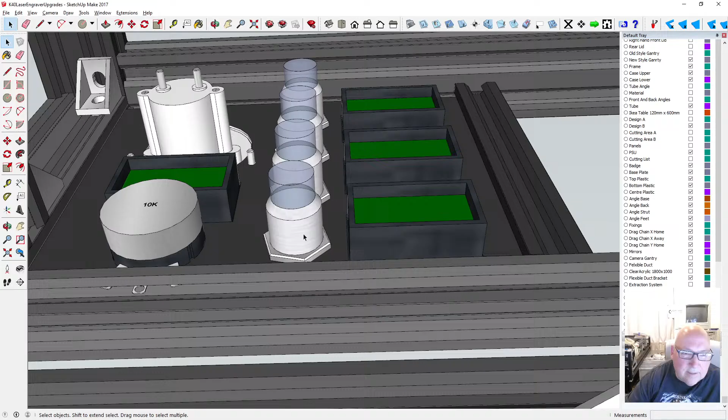Nearly there. Right, this is going to be the pain, isn't it? This is going to be the pain.

Okay, so I should be able to work out where these have got to go. So I'll do another one. Oh no, I don't want to alter the size.

What's going on here? No, that's not doing it, is it? Right, what is it going to be? 30 mil. 30 mil. And 30 mil.

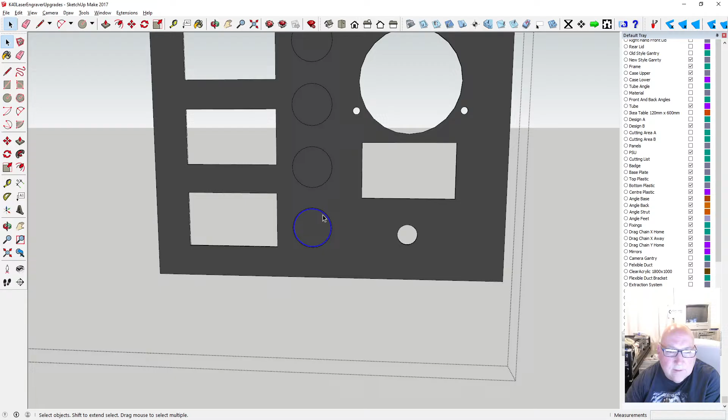Pretty sure we did extra for that. Let me just see if we did extra for that. Did we make this one bigger? Did we have a little bit of a gap? I think we did, yeah.

We're okay. Right, everything is done then. Everything is done. We've got extra stuff, more than we want. We've got buttons, knob. That knob looks a bit low compared to that one.

Can we do anything about it? Maybe. Let's go up a mil. Right, is 1 mil enough? Not quite, can't go much further. Maybe we can go another half a mil. 1 more mil.

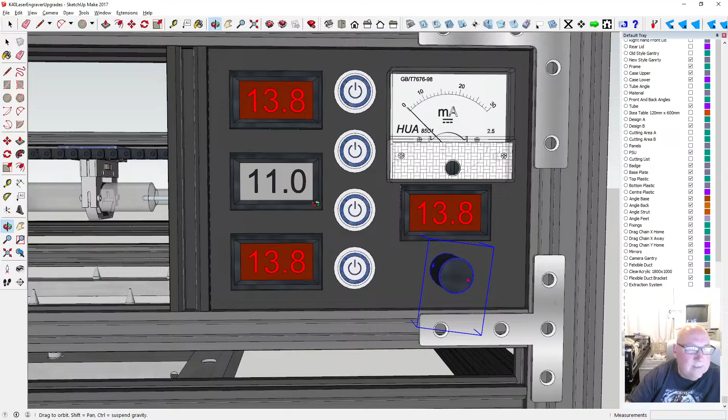Okay, so you alter that and you get to see the analog and the digital, and you got your displays, switch it on. That'll do for a starter, mate. That'll do for, that's alright, looks alright. Looks a bit clustered here, but anyway, we've got a bit of extra capabilities.

Whatever, I forgot the main thing, the stop button. It's not as if it's a CNC where you need to stop it crashing. Emergency stop, or test fire. So, test fire the laser, air assist, extractor fan, and coolant.

It's really that temperature. The button should be next to that for the different things. Anyway, we'll ponder over it overnight.